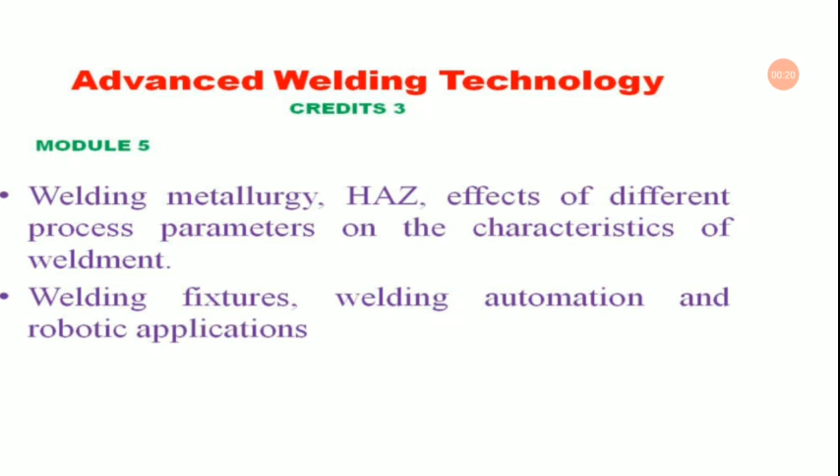So you have completed so far the welding metallurgy. Now today we will be discussing the effects of different process parameters on the characteristics of weldment. So let us begin our today's class. So here we will discuss the different parameters affecting the welding.

In this study, the effect of various welding parameters on the welding of mild steel specimens having dimensions 50 mm into 40 mm into 6 mm welded by metal arc welding were investigated. The welding current, arc voltage, welding speed and heat input rate are chosen as the welding parameters. The depth of penetration was measured for each specimen after the welding operation on closed butt joint, and the effects of welding speed and heat input rate parameters on depth of penetration were investigated.

Welding technology has obtained access virtually to every branch of manufacturing. To name a few: ships, rails, road equipment, buildings, constructions, boilers, launch vehicles, pipelines, nuclear power plants, aircraft, automobiles, etc. Now, welding technology needs constant upgrading, and with the widespread applications of welding, to consistently produce high quality welds, arc welding requires experienced welding personnel.

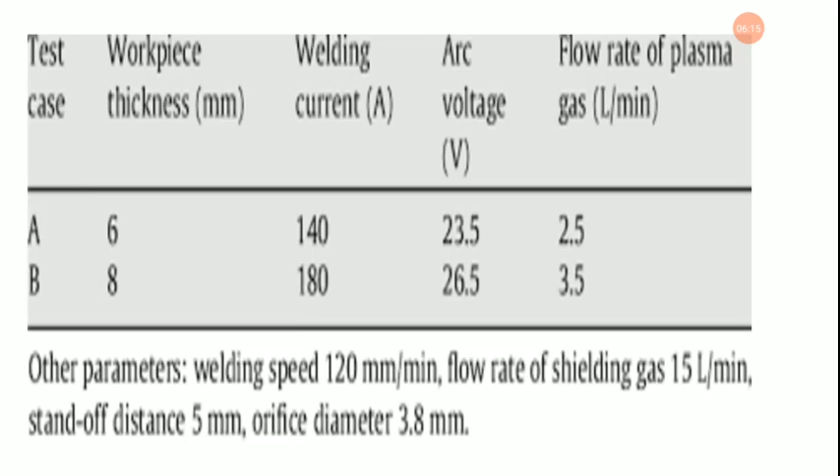Now, the effect of welding speed on depth of penetration. Readings of the depth of penetration obtained through a measuring instrument after cutting all the welded specimens perpendicular to the direction of welding are analyzed with the help of a graph plotted between welding speed and penetration. Voltage 24 volt and current 105 ampere are taken constant, and arc time is varied during the welding of specimens.

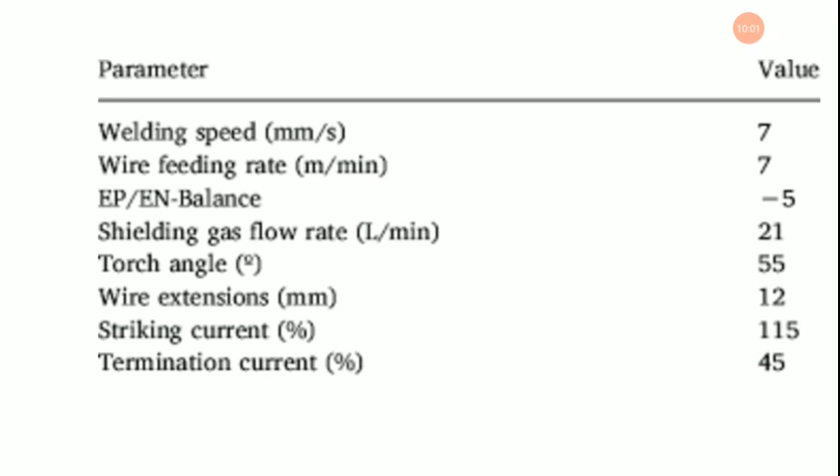Likewise, there are also effects of different input parameters on weldment characteristics in tungsten inert gas welding as well. Weldment characteristics like penetration, bead geometry, and depth of HAZ are extremely important characteristics of structural integrity in the case of welded joints.

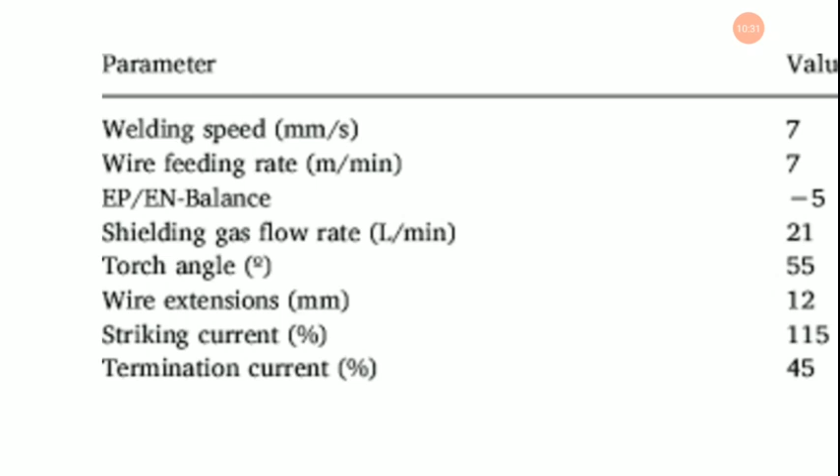The TIG welding process, which is used throughout the country for its simplicity and versatility, induces various defects like blowholes, porosity, undercut, and irregularities depending on the process parameters used. Electrode diameter, current, voltage, arc travel speed, and plate conditions like preheating are influential factors in deciding weldment characteristics.

It is extremely important to model and predict weldment characteristics depending upon the local operating conditions and to optimize them. In this present work, the effect of process parameters like current, voltage, electrode diameter, and arc travel rate on weldment characteristics in case of TIG were studied. A number of experiments were conducted on a TIG machine using all the process parameters described.

Weldment characteristics like depth of penetration, depth of HAZ, number of undercuts, and area of penetration were examined for the weld beads obtained from experiments. The aim of the work is to study the effect of process parameters on weldment characteristics.

So, bead geometry. The bead height and the bead width together constitute the bead geometry. The portion of the parent material which has been heated and melted and has the characteristic dendrite structure of a casting is called weld bead. Bead geometry depends on weld process parameters and the workpiece temperature. For example, for some welding process parameters, formation of a bead may be possible in preheated plates, but it may not be possible for workpieces at room temperature. Similar phenomena may be observed in case of cryo-treated plates.

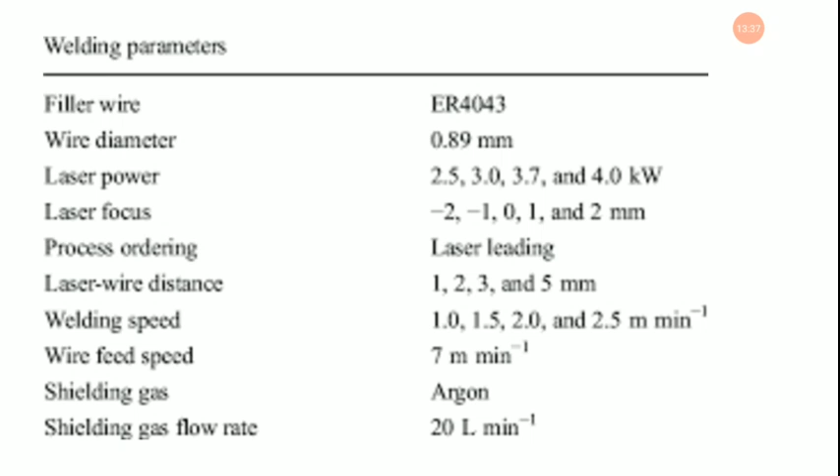There are many methods to determine the hardness. Among those, Brinell and Rockwell hardness tests are frequently used. In our testing procedure, the first test was the hardness test. For the hardness test, we made different test specimens. We cut a piece of 10 millimeters from the length of the welded pieces, like we made 50 pieces of weldment for the hardness test. Before the hardness test, we need to make the surface of the piece smooth after cutting.

For making it smooth, we are using emery papers of 220, 320, 400, 600 grades until we got the smoothness required. After getting appropriate smoothness, we have done a hardness test for the parent material and welded zone. In the hardness test, we found the hardness of the material after welding got increased.

Now, the Brinell hardness test is the method of obtaining the hardness of a material by indenting the surface of a sample with a steel ball of specified diameter under prescribed load conditions and measuring the diameter of the indentation.

Now we also have the calculation of HAZ, DOP and BW. So for calculation of heat affected zone, depth of penetration and bead width, we applied a chemical, that is nital solution, 98% ethyl alcohol and 2% nitric acid. For the test, we need to make the test specimen surface very smooth using different emery papers.

After making the surface smooth, we washed it very well. After washing, we applied nital solution. After a few seconds, we got a black spot for the welded zone and a light brown spot for the heat affected zone. We marked the bead width, heat affected zone and depth of penetration. Using a microscope, we measured HAZ, BW and DOP.

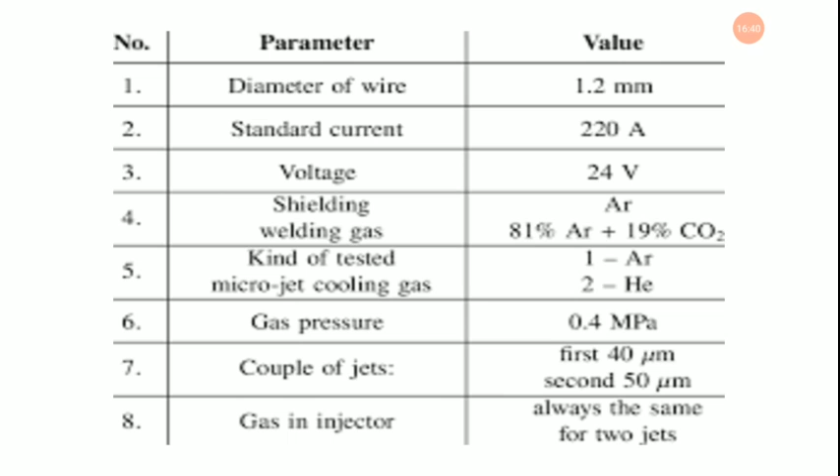So the principle employed in all impact testing procedures is that the material absorbs a certain amount of energy before it breaks. The quantity of energy that's absorbed is a characteristic of the physical nature of the material. If it is brittle, it breaks more rapidly, and for tougher materials, more energy is required to get fractured.

Now, if we consider this comparative study, here you will find that when the travel speed is 2.1, wire feed speed is 42. When the travel speed is 4.2, the wire feed speed is 85. And when the travel speed is 8.5, the wire feed speed is 169.

And when the travel speed is 10.6, the wire feed speed is 212, such that the travel speed is given in millimeters per second, while the wire feed speed is also given in millimeters per second. Now the constant parameters are wire type and diameter. Here we are using ER70S-6, 0.045 inches, that is 1.2 millimeter.

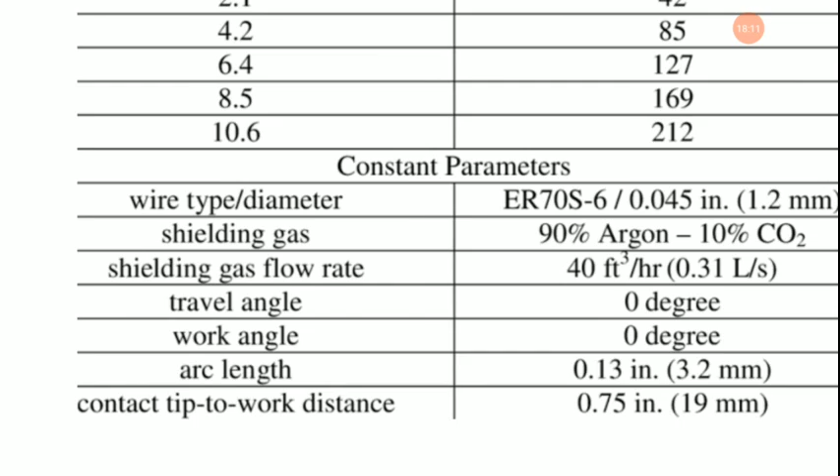Shielding gas is 90% argon and 10% CO2. Shielding gas flow rate is 40 cubic feet per hour. Travel angle is 0 degrees and work angle is 0 degrees. Arc length is 0.13 inches, that is 3.2 millimeter. And contact tip to work distance is 0.75 inches, that is 19 millimeter.

So here is the comparative study of the different parameters affecting the welding. So you can see with the increase in travel speed, the wire feed speed is also increased. So these are the important parameters we need to know while going through a welding process. And the different parameters that affect this welding have great consequences on the strength as well as the retention power of the weld bead of the joint.

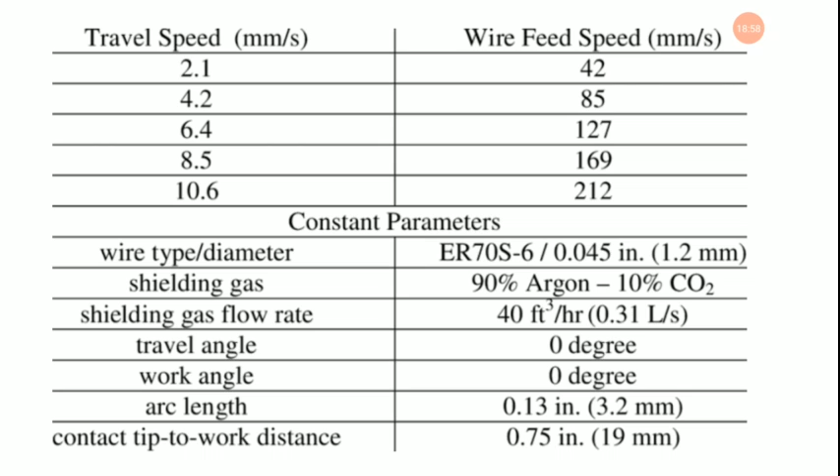So see, we have discussed today the different parameters. In the next class we will continue this class discussing more parameters as well.